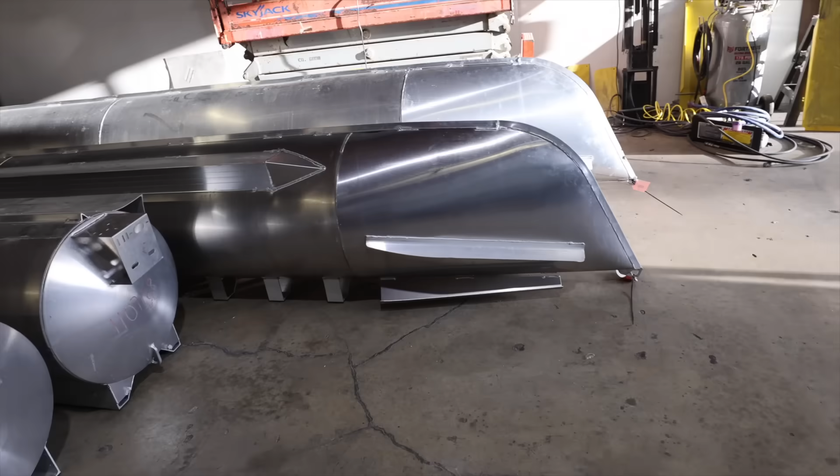In today's episode, we're here working on our pontoon yacht. This thing started life as an idea on a computer to build the ultimate pontoon yacht. I got a little wild with the company credit card one day and the project started happening real quick. We got 6 pontoons delivered to the shop. We cut some in half and attached them to the others to make ultra long pontoons. We cut the fronts off of some center ones and arranged them so we'd have a 4 pontoon layout.

And in the last episode, we built a massive enclosure for our hot tub that is mounted in the front of the boat. So in today's episode, what we're gonna be focusing on is attaching everything to everything. All the flooring, all the decking, we need to have a flat surface across here with aluminum stringers that are gonna attach every pontoon to every pontoon, the hot tub box to every pontoon, and it will give us a place to put our flooring.

Then we'll start applying some flooring and testing that out and see what layout's gonna work and how it's gonna feel. There's gonna be a lot of cutting and welding. This is gonna be an expensive one.

Let's get started. So it's gonna be a little quieter than usual because I'm pulling the weekend shift. I love coming in here and working on weekends because there's no outside distractions. Every other business is closed, nobody's calling me. I can just have fun and hunker down and focus on work, which I really enjoy getting the opportunity to do.

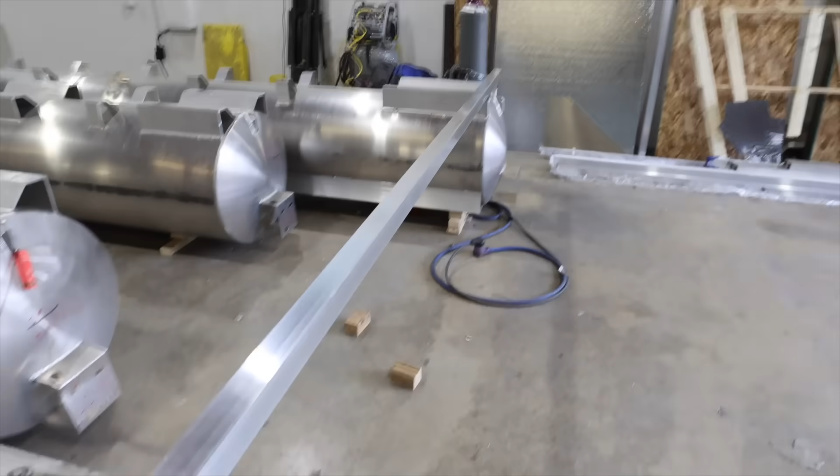So I'm gonna go ahead and start here on the back. Now you can see we've got one example stringer run right here. This one in particular is some C-channel that is actually very much just a placeholder because we need to put some really heavy duty stuff back here because our swim deck is gonna mount to this stuff back here. So this is gonna be rebuilt. It's a placeholder to make sure that we're keeping all of the pontoons square and level.

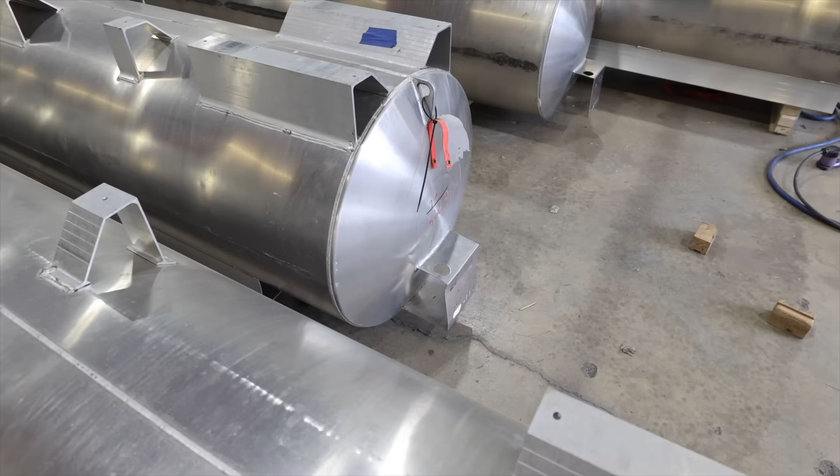The engines mount off the backs of those 2 pontoons right there in a really smart way where, when they swing, they won't hit this pontoon. I thought about this a little bit. All right, so I got this really cool thing, which is schematics for our engines. It's got a 30-degree tilt each way, which takes up 20 and 5/16 space at the max width if it's all the way tilted. If it's all the way cranked, in the back it's 18.5 and in the front it's 20 and 5/16. So let's look at that in real life.

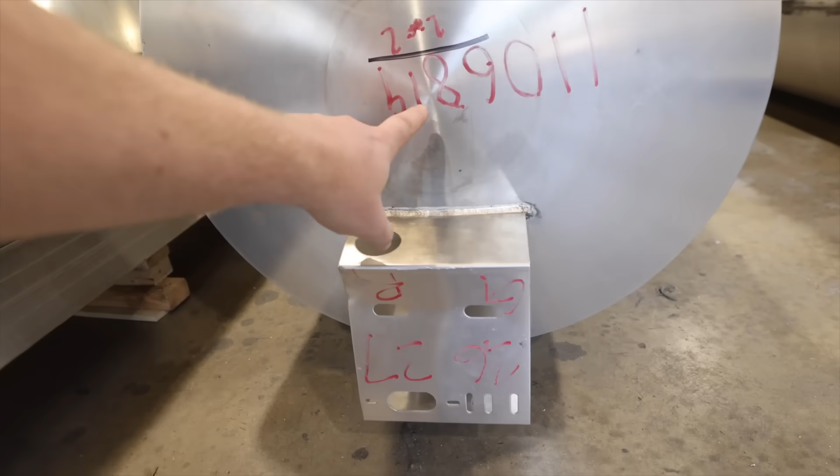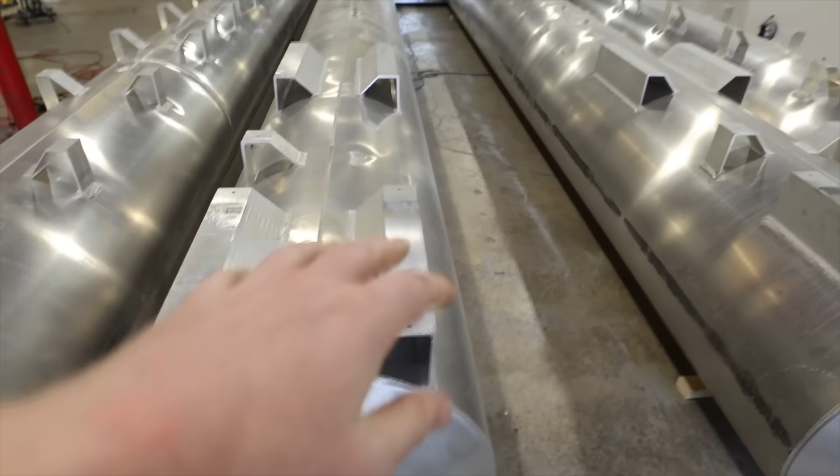Sorry, I just dropped the measuring tape, but I measured from the center of this, if we mounted the engine directly in the center of that, over to here, and we are 19.5. So I'm gonna have to scooch these center guys inward a little bit. We want to have them as wide as we can. That's going to help with stability of the boat. So we're moving this thing over about 1 inch, and that will be its resting ground.

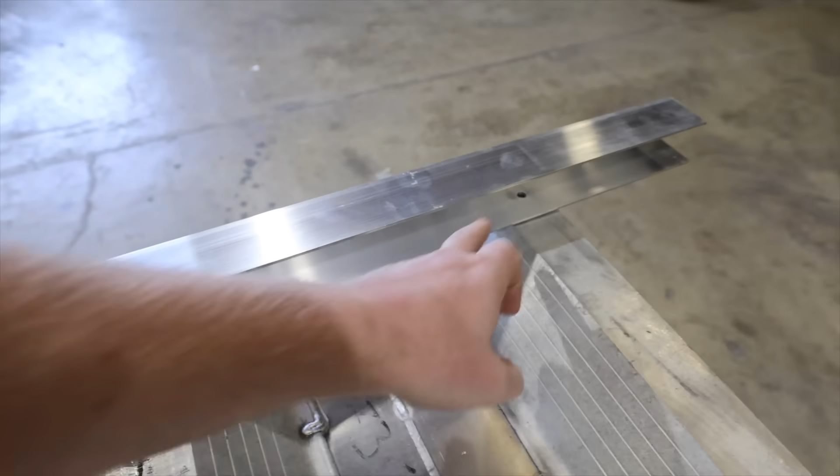So figuring out the dimensions of these holes is actually really easy because you just take the math from your max width and subtract it and then divide it. But this is going to take every last brain cell I got to figure out. The best way to do this is definitely with math, measuring the distance of the holes here, and then using math to say where each set of holes goes. Drill them all, and then move the pontoons to match that. I'll get this figured out.

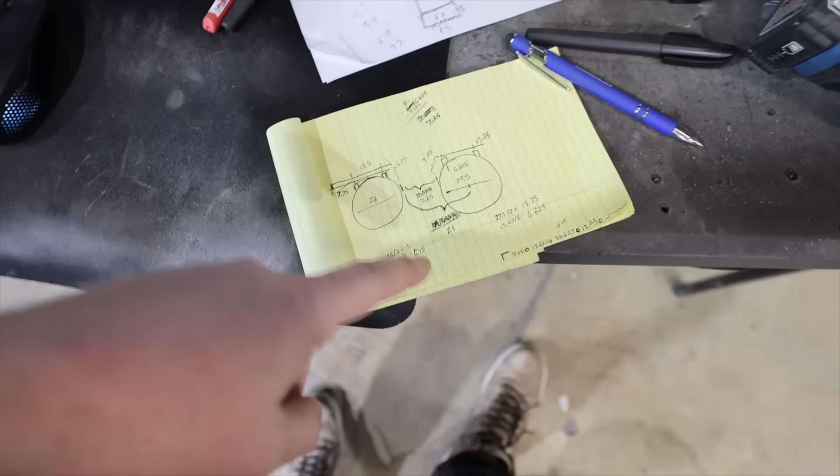All right, I mathed it. It's not fun, but there's the plan. This is the drill out pattern. What I'm gonna do is take this marker right here and cut a piece to length. These pieces that go on the back full width are 11 foot 10 inches to give us room to fit out the garage door.

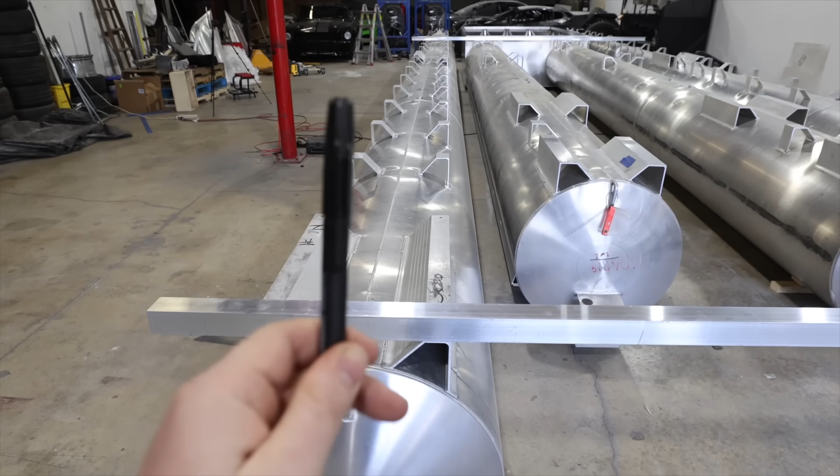Been seeing that comment a lot. Yeah, we're planning to fit out. I'm gonna cut it to length and then I'm gonna mark out all my holes based on math, where they go. And then I'll move the pontoons to make sure that they match up with all of the holes. And then we'll measure just one last verification from the center to the edge and make sure it's 21 inches. I added a little bit of space for safety room.

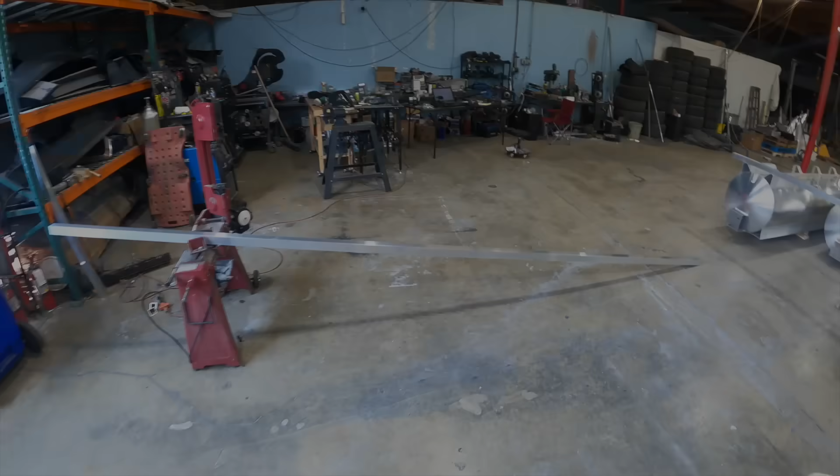Well, my math was sound, but I did it off of a pontoon. You could see that that guy is not quite level, and that caused it to be off by a 1/2 inch when I tried it out on the level one. So all this means is I got to take a 1/2 inch out of that dimension right there, which will scoot these 2 pontoons more outward a 1/2 inch, and we'll be in good shape. So I'm going to go ahead and do that.

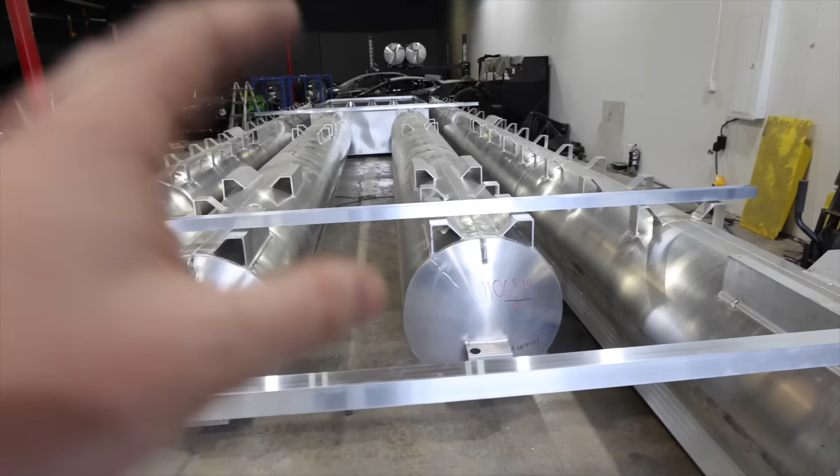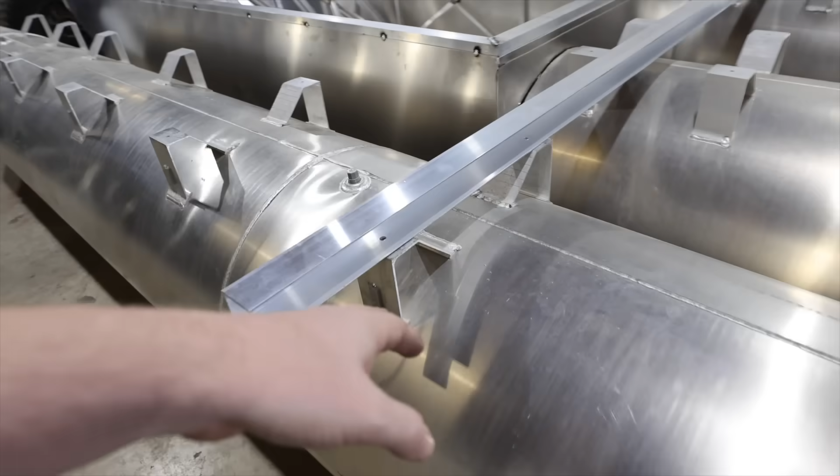I'm going to drill this, I'm going to bolt it in, and then I'm going to also walk over to the front one up here. Do we have a front one? No, we don't. Dang it. So I'm going to copy the math over. This obviously has some holes already, but I'm going to add the 2 holes for the inner pontoons and then bolt everything up and then shim everything so they're level to the world, and then I'll do the corner to corner measurements as well to find square, and that'll get everything lined up, and I'll feel good about where our holes need to be. Hole calculations.

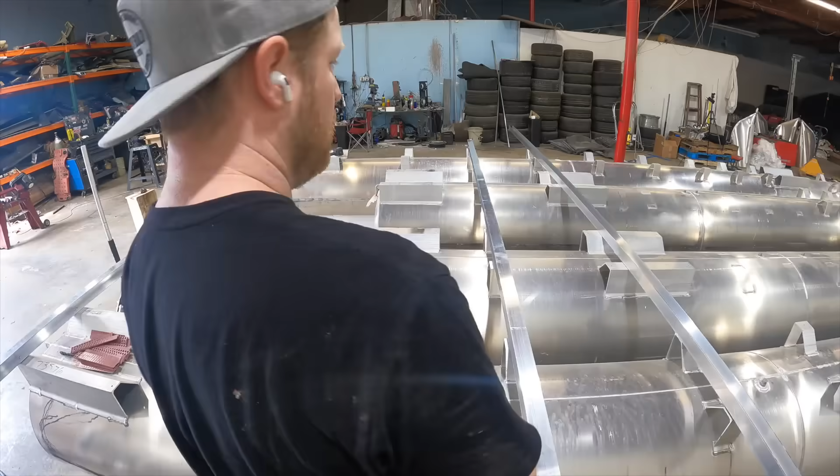Okay, anyways, I got a stringer on there, drilled, bolted down. Now, the other thing that I wanted to mention is as I'm getting a tape measure on a lot of these things, they're built pretty rough. Different hole dimensions, different holes are placed in different areas on some pieces. Like for instance, right here, my hole is measured perfectly. It works perfectly on the other side, but here I'm almost a half inch off.

My favorite measurement, I'm a third of an inch off right here. This hole should be there. You can also see this thing sitting low, so it either got dented maybe or it got moved in the creation process. It's just not right. So I have to custom drill that one out, and then I'll put a bolt through it. So my hope was with these pontoons is that I would use the math and throw a bunch of stringers on here, and then once I bolt them all down, everything is going to go into place and be properly aligned and happy.

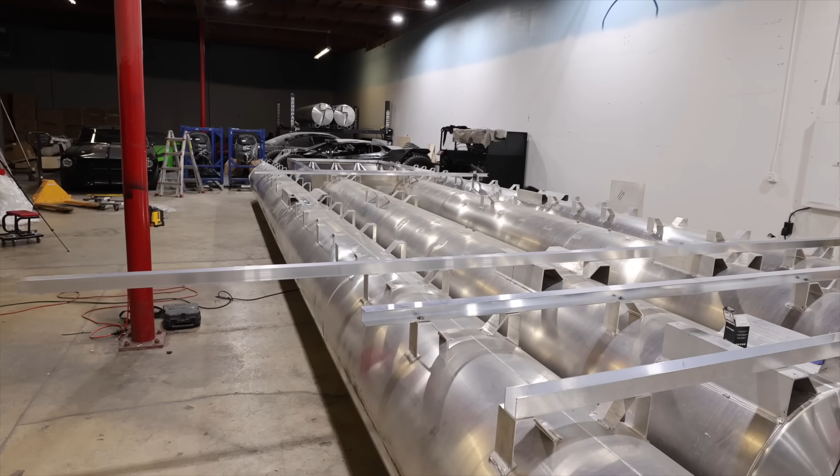But with not having a lot of the mounting spots on the center pontoons, we have to just be very careful doing that. So things need to be cut and moved up front, but I need to make sure everything's square and perpendicular. So I got to keep doing some front stringers here to make sure that this is all happy. So I'm going to do these two right here, and then that one right there, and that'll get me feeling a little bit more comfortable.

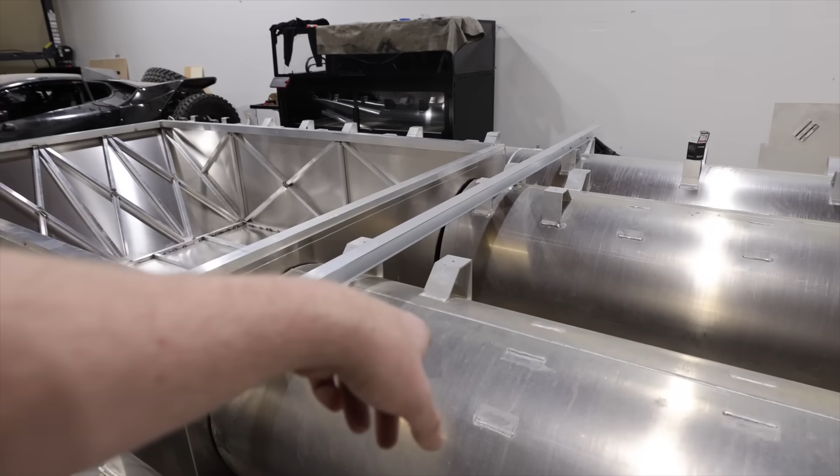And I might even do a temporary few in the center. I take 4-foot drop pieces off of these cuts when I make these. If that's less than 4 feet, which I think is going to be really close, I might build a couple that are temporary right there because I know the width that those two mounting points are supposed to be from each other. And this is just to hold everything in place and get it all snugged up, tightened down. That'll get the rotation of these things happy before we start creating the new mounting points, so we know that they're dead on.

So like, for instance, we got to weld them in there and there, and we got to weld them in there and there. So before we start creating mounting points, we need to really make sure that these things are bolted up and happy in the way that they were built.

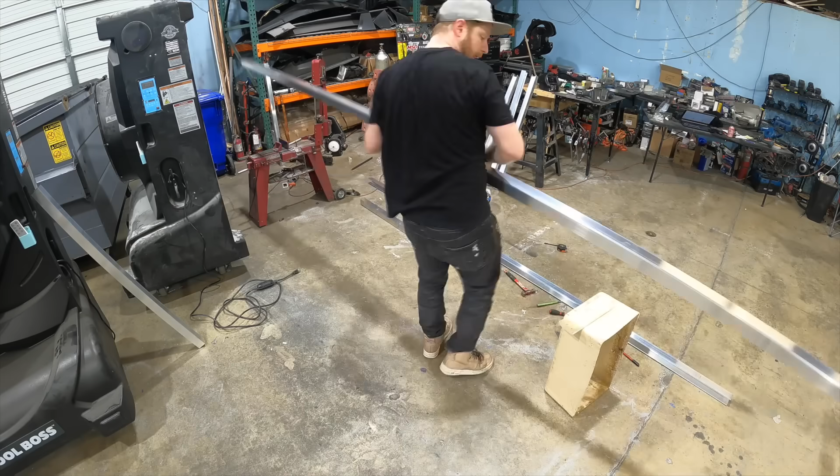The next day, the guys came in and helped me. I took all those things that I cut and drilled yesterday, and we got bolts in every single one of them. We got them snugged down onto the pontoons, and everything is really firmed up. It's squared up. It's right where we want it to be. It's flush. It's happy. This is really good. We have a nice sturdy structure now. That's exactly what I wanted to get started.

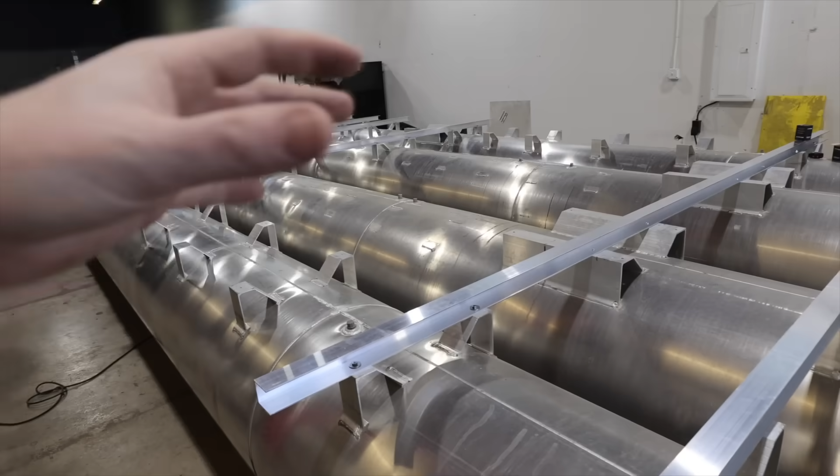I've got those small guys in here setting the width on the two front pontoons nicely, getting our height dialed in as well. So everything is really coming together. I'm happy about it. So now I feel very comfortable with where all the pontoons are placed and that they're in the right spot. So that means we can start making the mounts to basically adapt. Obviously we cut a bunch of the mounts off of the center pontoons. So now we need to build those back in to match with our outer pontoons.

So what we're going to do first is work with these pads. We've got a set of pads on the two centers, and then we've got a set of pads on the outer right here. Oscar got those pads drilled out and bolted in, so we're good there. We moved one of those railings up here. We're gonna deal with the last little pads before we start welding in all of our fresh mounts.

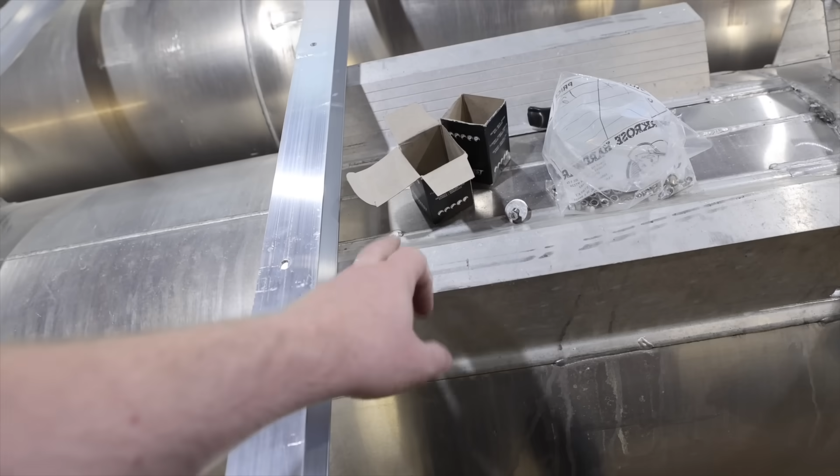These pads, the dimensions are totally off, and we need all these to be completely flush. So we're gonna flip this around, drill some siding holes in it, and drill new holes into the pads, and then we'll bolt this railing in. And then while that's going on, Kyle and I are gonna get this thing prepped up to start bolting in right here, and we'll start bolting in some of our new mounts on the center pontoons. Get them ready to be welded in.

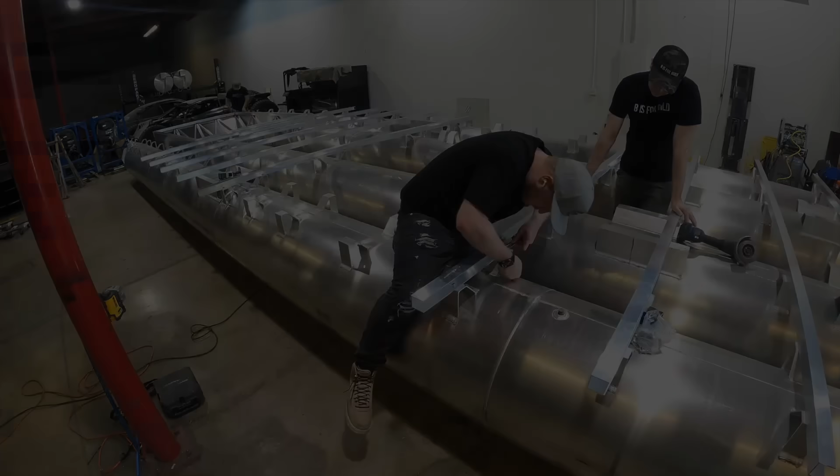It's welding time. You guys remember that movie? It's like, it's Morbin time. That was an insane line.

Anyways, welding time. So you can see we've got it bolted in here, coming across, and then we used our holes that were in here as the templating for the placement on these guys. And now Oscar is gonna weld those things in, and then we'll move this over to here, bolt everything up just the same, and weld another set in. And then we're gonna get over here and do the same over here. And then, yep, it just keeps going.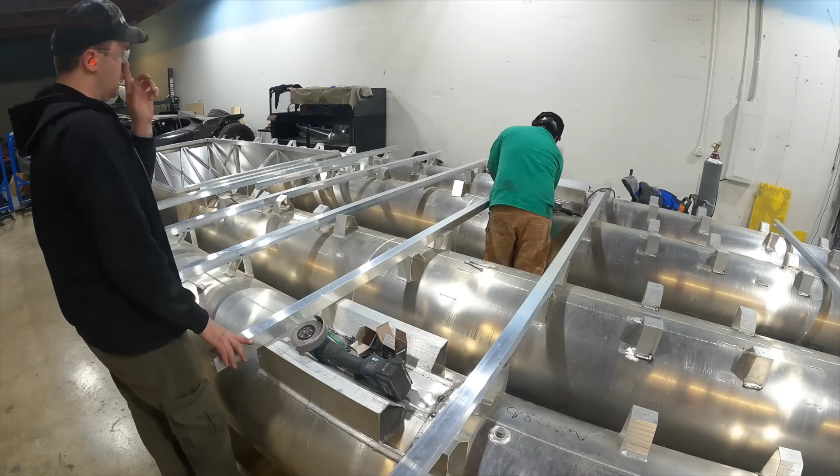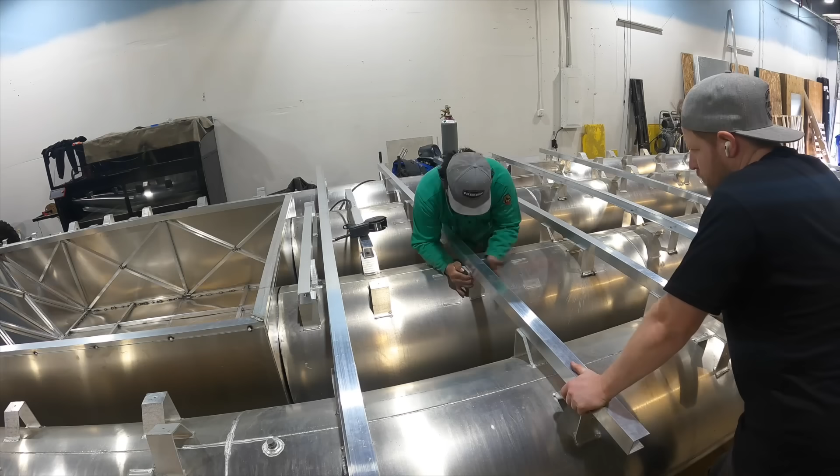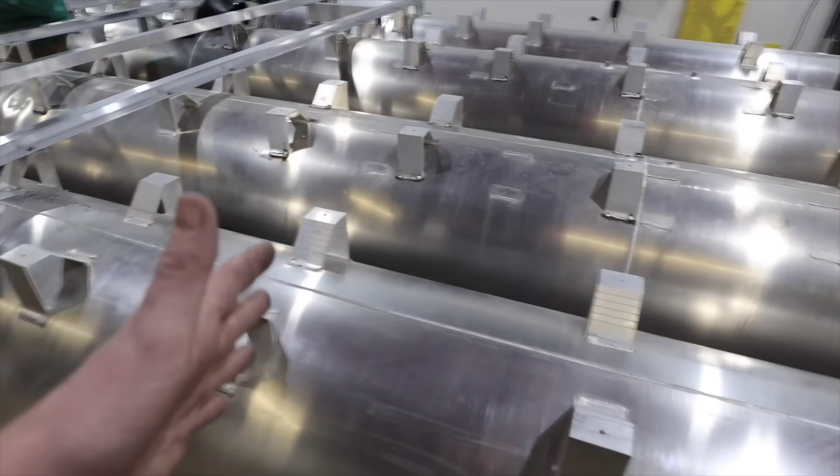Oscar's got a ton of these things welded on here. They're all matching and all lined up, but as you can see, we got a big blank spot here because we don't have enough C-channel. C-channel is only in the parts where we don't need a ton of structure, and we're gonna use 2" in the other stuff. So Kyle and I are gonna go ahead and grab a bunch of that 2" over there. We're gonna cut it to length. We're gonna drill all the holes in it, and we are going to drill access holes.

That's the new thing, we're gonna, like, imagine punching a window in the side of it here. And also, if you're doing something like this, it's super replicatable. Just build a template. That's what I did. You probably saw it earlier when I was cutting all this C-channel. Build a template, work off the template, makes everything so much faster.

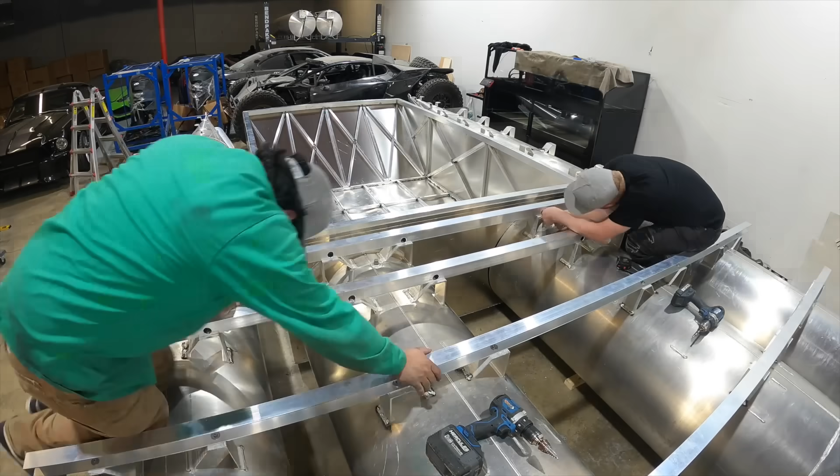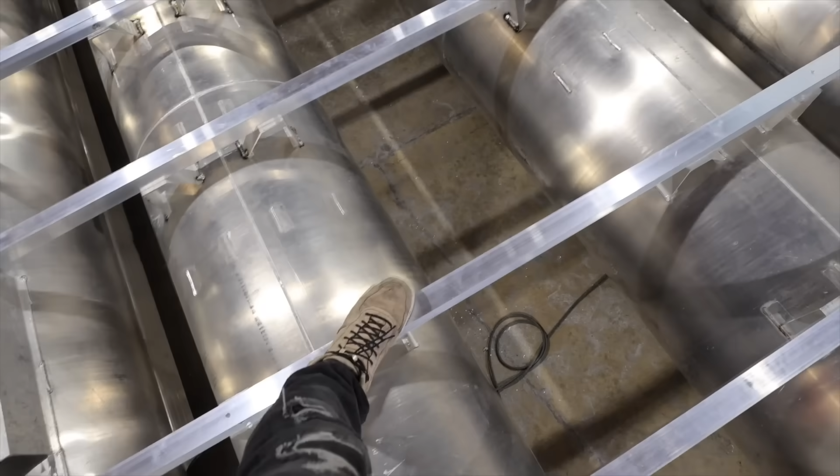What's up, guys? Back for another day. We've got all of the stringers for the main part of the deck built out. It's kind of cool. We can get up here and walk on stuff now. You can see going all the way back and all the way forward, all of these are done.

One kind of cool thing too that I noticed is, when I looked up the general spec for a C-channel flooring support stringer for a pontoon boat, a pontoon boat is usually going to have pontoons about the size of these outside ones, 25 inches, and they're usually about 8.5 feet wide. So you can imagine it kind of from there to there. And they'll have a big empty space in the middle over here. God, I really hope I don't fall through this, but at least if I do, it's on film. So they'd have a big empty space right here, and there'd be a lot of flex.

But since we have the center pontoons, our biggest empty space is just this right here, and it is extremely rigid and strong and can definitely take the weight. I mean, you put the flooring on there too, which disperses the weight even more evenly across the floor, but I'm very happy with the C-channel ones. And then obviously in the more rigid areas, we have the square.

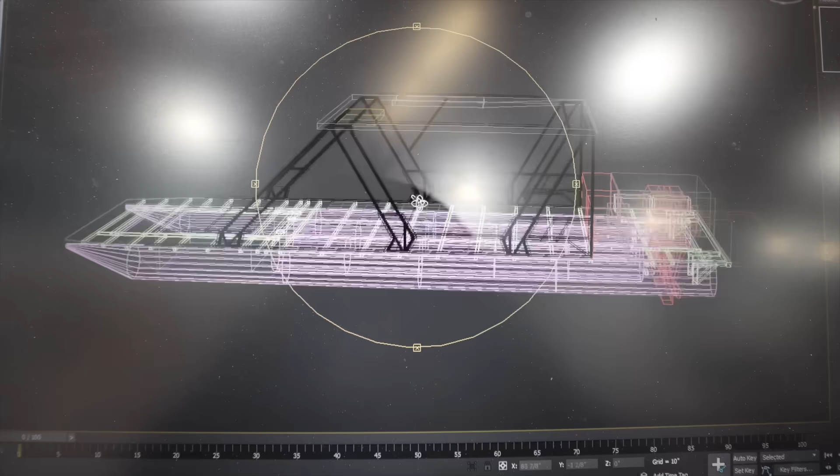And you might be wondering, where do we need the rigid guys to go? Because I was thinking the same thing. And it needs to be the most rigid everywhere that the second level is bolting in. So right here in the middle needs it, right here in the back. And then everything surrounding the hot tub box needs to be the full square tube rather than the C-channel. When we have the blank spaces, like right there, and so on, that's where we can use that C-channel.

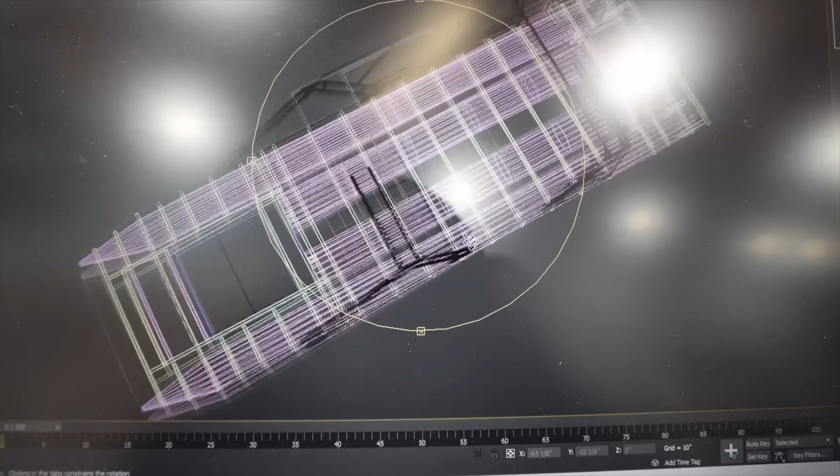So if you look at the boat right now, we just threw a few of these in the middle to fill in the space, but it does look like overall we're gonna have to use a little less C-channel and a little bit more square. But they're pretty easily swappable right now. So we'll figure that out in their placement later, but for now we need to start building out the hot tub box supports out of the square.

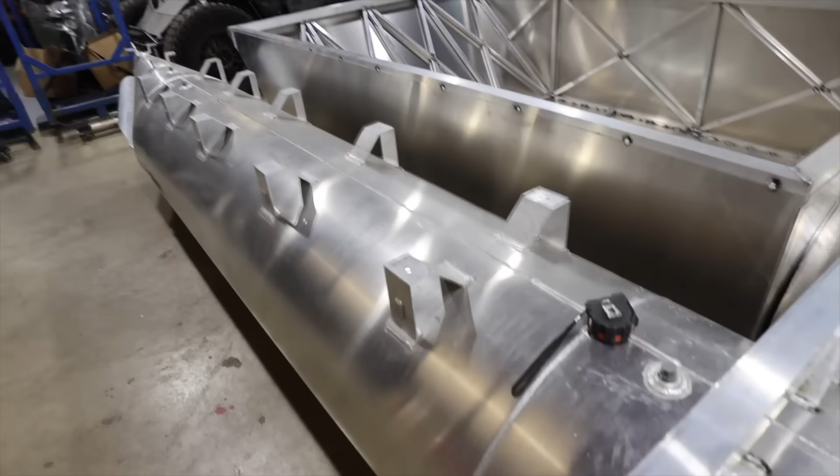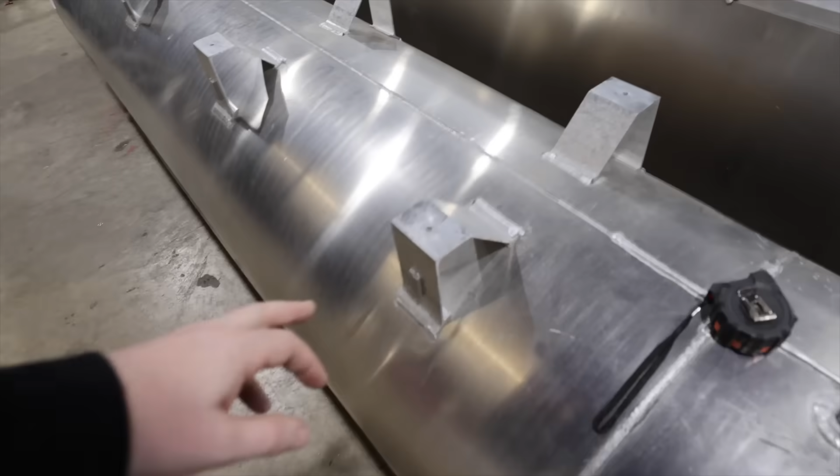Just like we did with the other stuff, I wanna do this with math and then verify it with common sense. So what I'll do is I'll take the width of the box, subtract it from the center of one of these standard cuts that we did, and that should tell me from here to here how far it's going to be. I'm going to go ahead and do that math. I'll cut one as a test piece, and then we can test fit it up against the box and make sure that it's the same on both sides. And then if that's good, we will do our math for our hole placement, and then we'll start mass producing. We got 1, 2, 3, 4, 5. We got to make 10 of these bad boys.

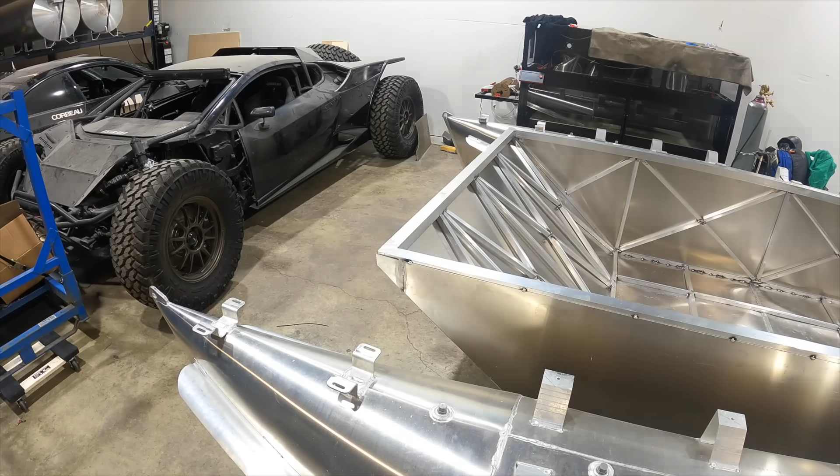Okay, we got the front beam on there, front stringer is on there, and then Oscar did a center line on the box and a center line on the back tubes, and then just ran a straight edge across all of it, centered the tub. We measured every bracket to the center of the tub, and it's looking great. It is very much centered.

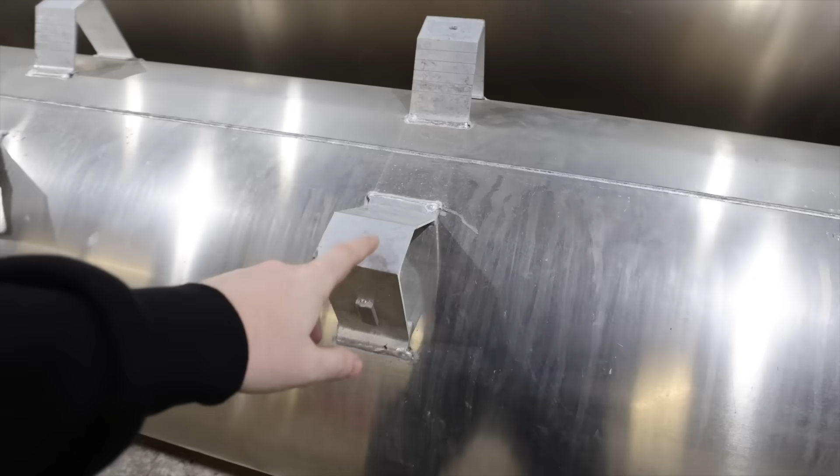So the next thing that we're gonna go ahead and do is run a string line from here to out there, and then we're just gonna measure every single one. Boom, boom, boom. We're gonna number them all. We're gonna cut them all to length, and then we'll set them in here, and we'll mark our holes from the bottom up. Because as long as our tub is centered and we know our pontoons are in the right spot, because all that added up, that's all that we need to do. So we're basically building to the box now rather than fussing with these holes, because they are just absolutely crazy and they don't match from side to side. So we're gonna use the pontoons as a template.

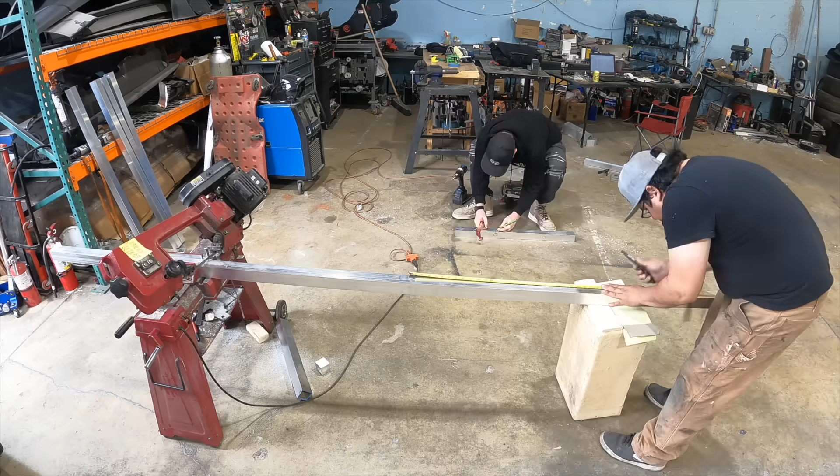Okay, Oscar and I got our 6 pieces cut for each side. We're gonna go ahead and get these on here and bolted in to each side. And we should have a nice straight line of aluminum stringers running down, connecting to the tub. The hot tub.

All right, look at that. The hot tub has its supports all lined up. We just threw 1 bolt into each. Now this is really cool to step way back and look at this. Hang on. How cool is that? We built a giant structure. This thing is rad. I like this angle because you could just see the hot tub box just disappearing out into the center of it.

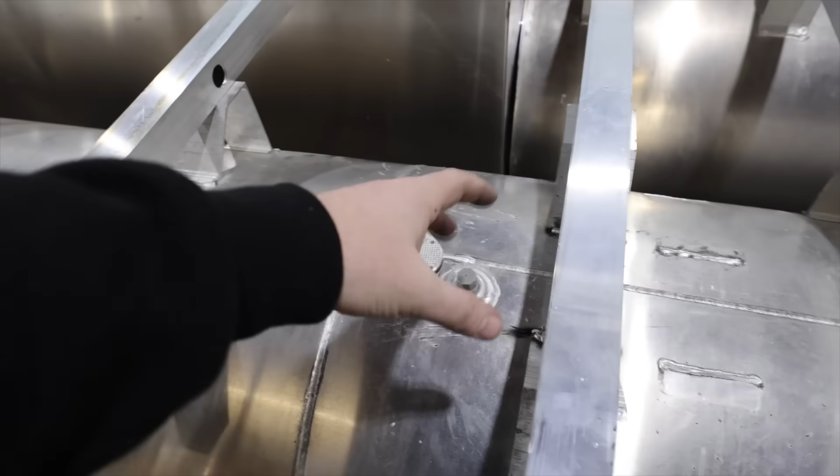So that's all good. Now there are some more supports to be coming around the hot tub box, but we need to weld the hot tub box to these pontoons before we do that. So we're gonna pause on that, but there's a lot of stuff that's going to connect here to here. We're going to connect here to another set right here of these mounts with a nice gusset, a nice support coming there. So we're going to go there to there, and then there to there, and then in the front there to there.

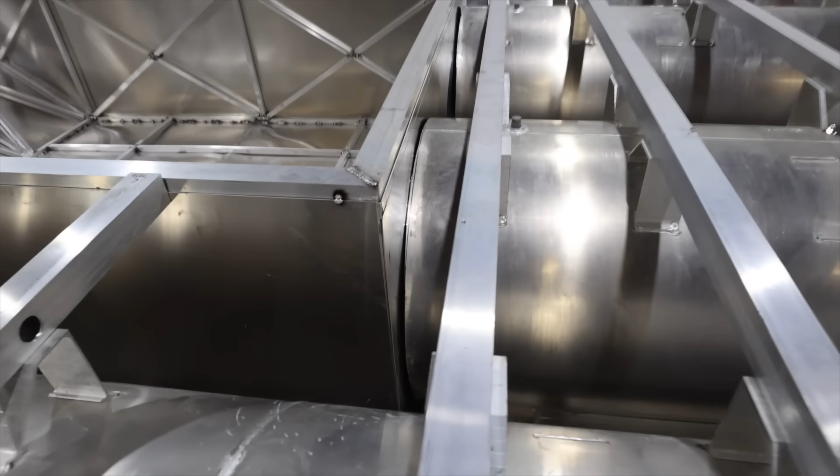So there's a little bit more to go, but the hot tub box, although it's perfectly centered, that's good. It needs to slide back a little bit more, so we got to cut these things flat. You see we've got those guidelines there where the thing's sticking out a little bit extra. We're going to be cutting those things flat and welding the hot tub box to those pontoons, and then we can support it all in and bolt it all up.

But it's also interesting too because we have to be able to get underneath that to weld it, so we're going to have to be able to lift just the hot tub box and the center pontoon. So it's a lot of bolts that got to come back out of this thing. Or we just lift the whole entire thing, who knows. Now that we've got our stringers and our supports on here, I want to try out the decking material and walk on this thing a little bit and see what it's going to be like.

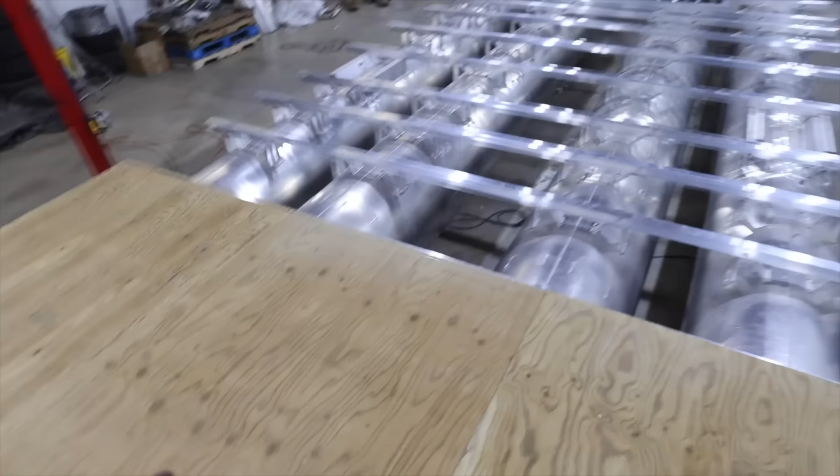Oh, you guys, this is so cool. Well, it's fun to walk around on the boat for the first time, but then it's also so cool to just look at this and think like, okay, so 6 feet long engine compartments, right? They come back off of there. And then from here to here, you got barbecue space right here. And then you would be standing here. First seat is kind of like right along there. And all the way forward is epic boat space. This is so cool. I'm so amped about this.

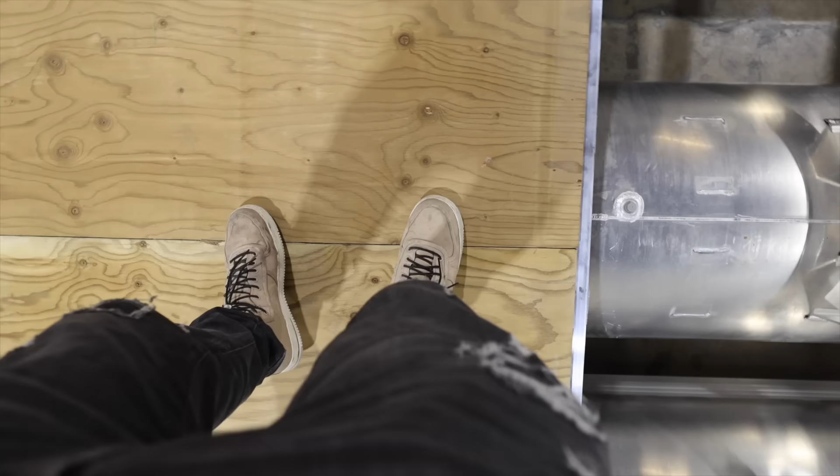It's really, really robust. You can't feel when you're walking on it where the seam is. I know there's nothing under me right here, and I'm bouncing around, and you can't feel the difference of where the support beams are and where they're not. And that's not even bolted down yet. So that's going to be great flooring. I had worries about having a seam right here because we have to have those seams running all the way forward, but no longer do I have any worries.

And these boards will be staggered. The game plan is we're going to offset them and stagger them so these seams are not all going to be on the same stringer, because these boards are really sturdy and really strong, and they're going to add even more of the, I guess, front to back rigidity that we want to have in this boat. So we hopefully don't snap off the hot tub box or snap our custom made long pontoons in half. But I'll tell you, it's pretty damn sturdy these days.

Now that we got all those stringers in there, it's bolted up good, and it is so fun to be able to walk around. We've got to weld out a bunch of stuff, and then in the next episode, we're going to start mounting the engines into the back here. It's going to be exciting stuff.